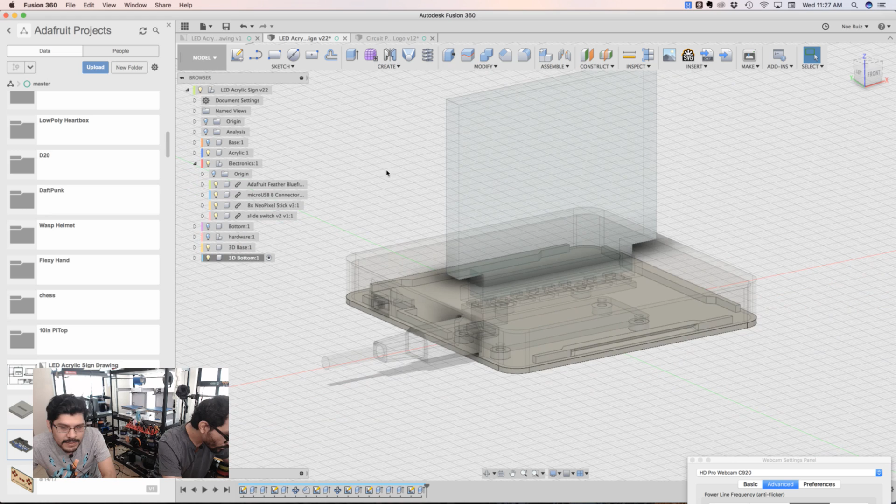We'll take a look here at Fusion just to look at it real quick. So I gave you guys the file, you can download the STLs if you just want to download and print it as is. If you want to make some adjustments, you can download the Fusion 360 archive and put it in your package. It's not just Fusion, you can download it as a step file or an IGS file, so you can import it into SolidWorks, Rhino, Onshape, any of those packages, so it's awesome.

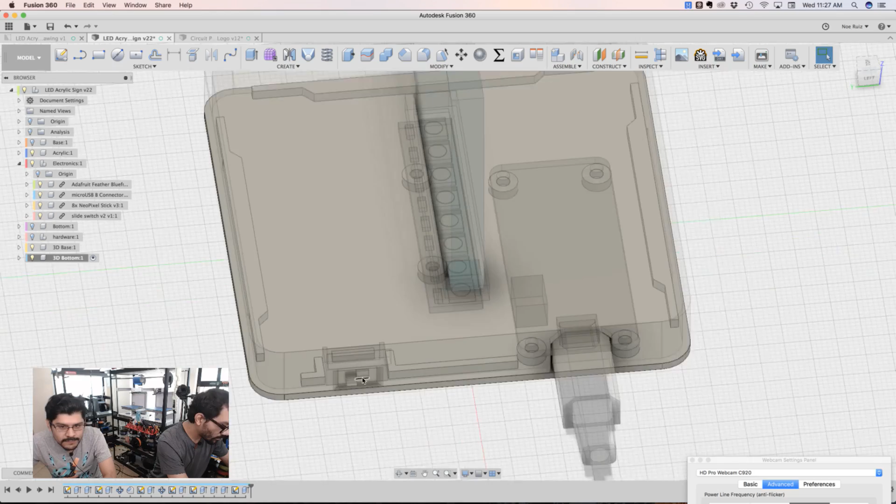Let's take a real quick look at the full assembly here. This is kind of like an X-ray view of it, and what's cool is I got some components in here. Apart from the case, I have the slide switch, the generic feather board, the NeoPixel 8 NeoPixel stick, and even a USB connector. I figured I'd design and model the USB connector just for clearance purposes.

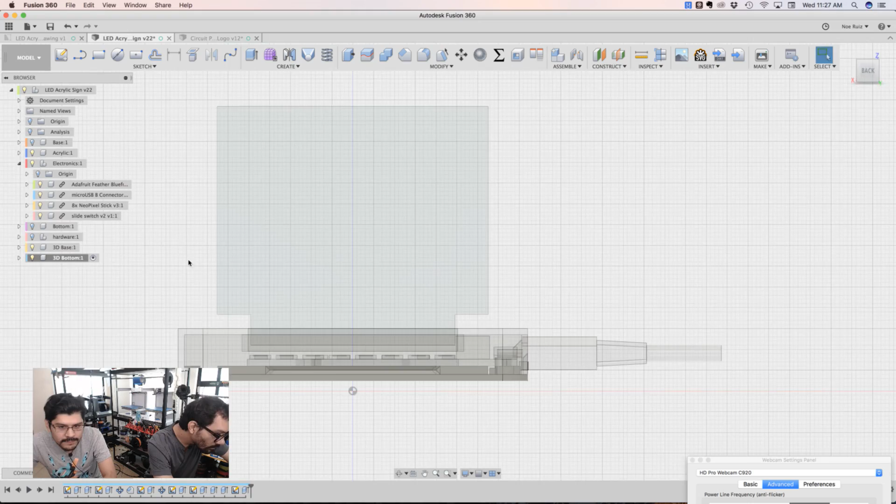I also have my acrylic piece here, which is kind of outdated, but it still works. So if anybody's interested in remixing the design, you can do so.

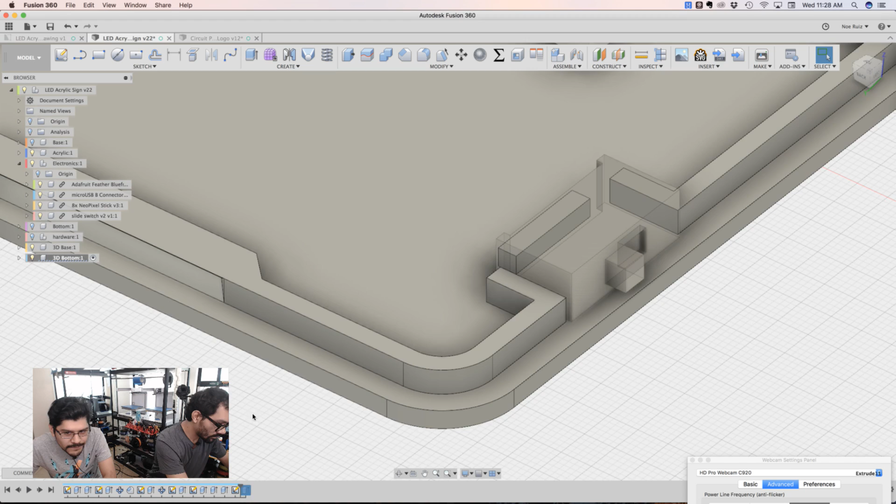One thing I want to note is it's a little different here. If we look at the bottom, you'll notice the lip has these cutouts in all four corners. I had a bit of a problem where, if I step back, you can probably see what it looked like before. See this corner here? For whatever reason, even though I have a nice gap, if we take a look at a section analysis and look at the two pieces, you see I have a little bit of a gap where these nubs meet and intersect with each other.

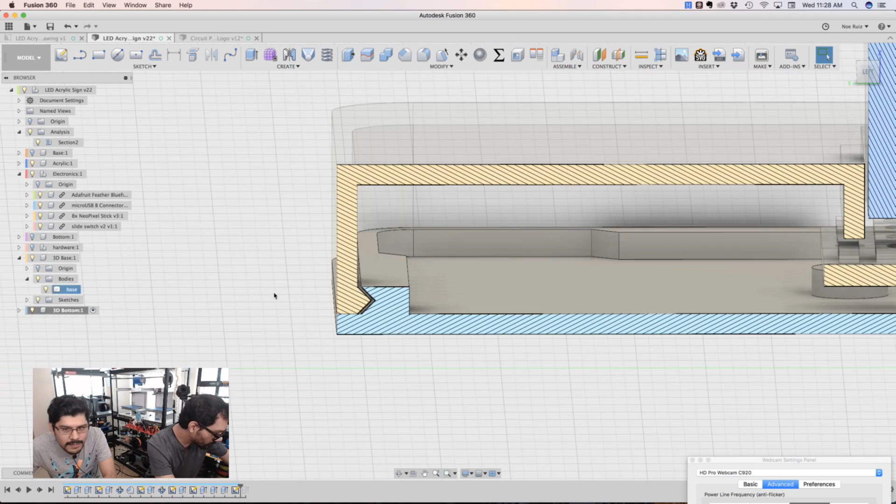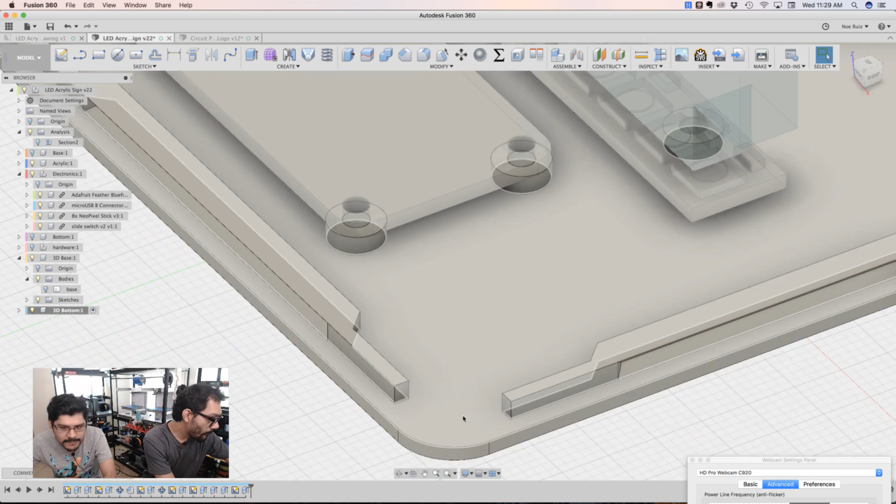You'll see there's a bit of clearance there, about a 0.3 millimeter clearance, and that typically works fine, but for whatever reason these corners were bowing. They would bow and wouldn't work so well. So what I did was just cut them out, and that helps tremendously to make this nice, flat, and even. If you're finding yourself with that problem and you're not sure why, just cut those corners out. I don't know why, maybe it was just the slicer or something, but it worked for me, and it kind of saves on material too.

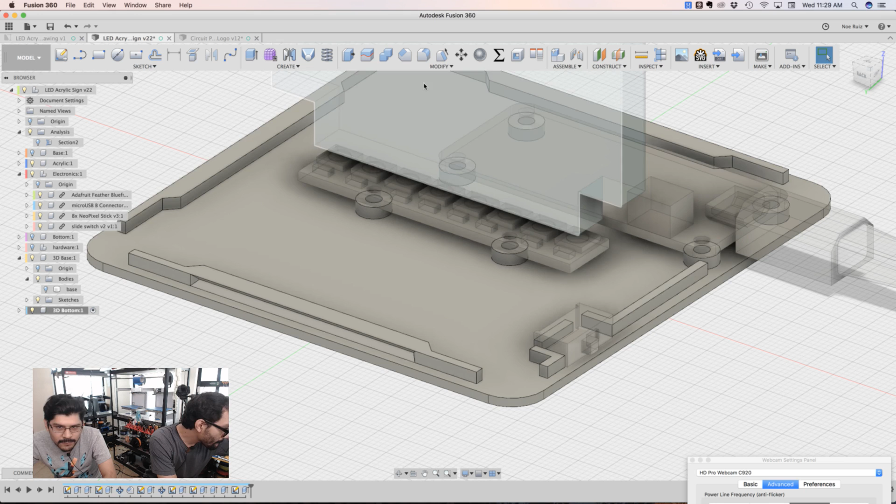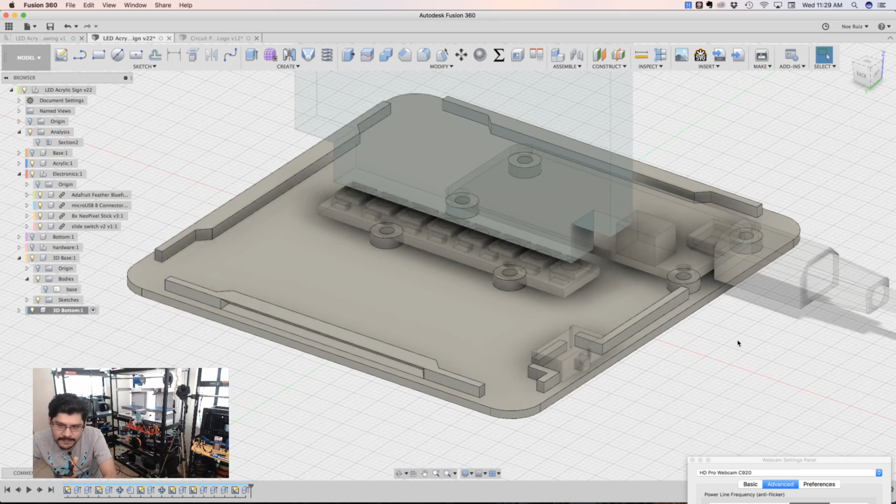So that worked out really well. I also did some interesting different ways to speed up the process. Normally I would make these nubs and indentations one by one, or mirror them, but in this case I actually used a circular pattern to duplicate it on all four edges. I also suppressed this area over here because I didn't need it there, since that's where the switch and the USB port needs to be. So just a little bit of CAD stuff there. That's mainly the interesting things about it.

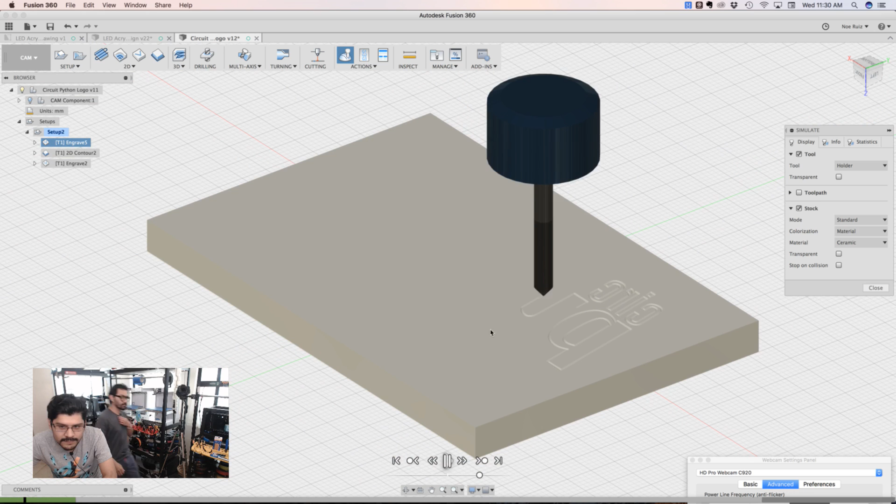It's pretty simple, but one thing to note is that I actually milled it from the opposite end. So although I designed it this way, I had to mill it inverted, flipped this way, because I found out that when you're engraving acrylic and edge lighting it, it actually looks much better on the opposite side, the side that is clean and non-engraved.

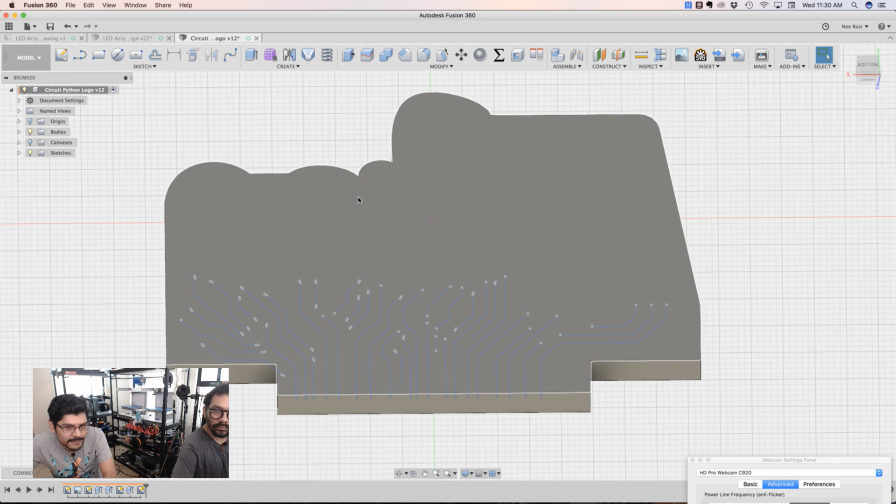So that might sound a little weird, but let's go ahead and jump into the overhead and show you guys exactly what I'm talking about. Let me fix my focusing before I jump into this. I'm going to change the focus over there.

Can you move real quick, Pedro? Yes. Thank you, thank you.

So let's take a look here at this guy over here.

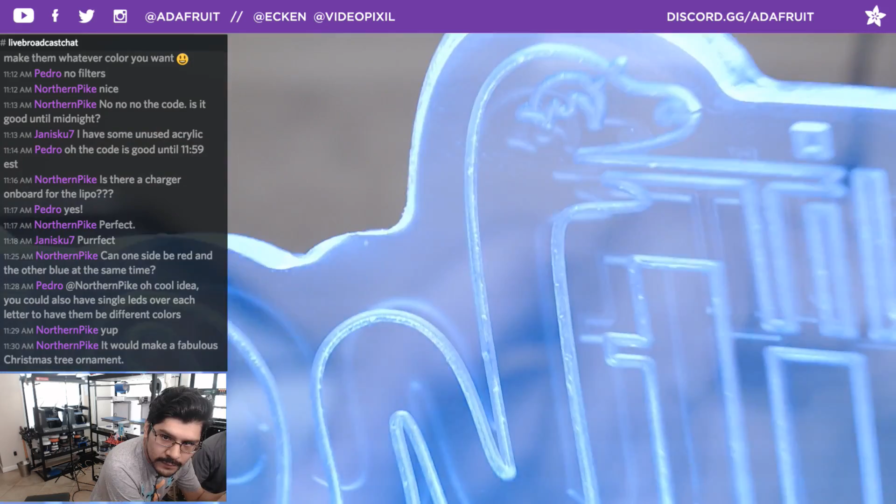So this is actually where the milling was done. You can see it looks kind of grungy, there's still a little bit of particles in there from the milling process. If I zoom all the way out with the focus here, it looks okay, but watch what happens when I flip it. It looks way more punchy, right? That just stands out way better.

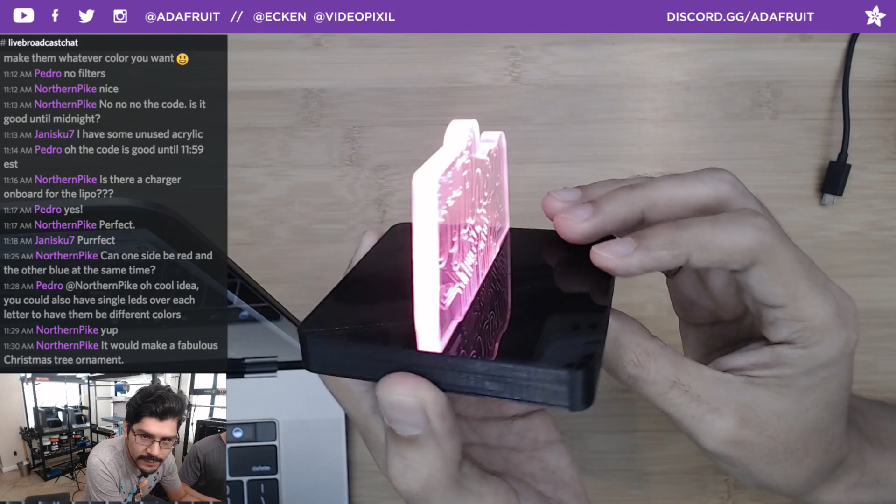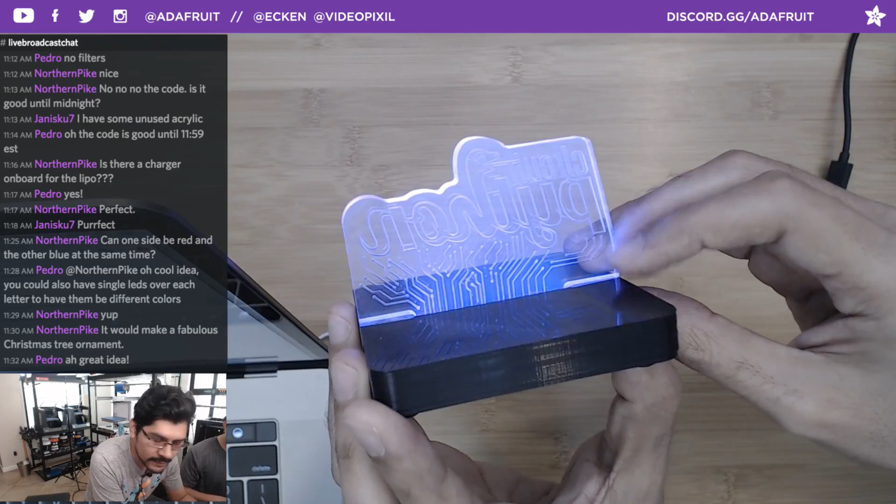So this surface here is clean, there's no engraving on this. The engraving is done on this side. So if you're ever doing an engraving on your mill or laser cutter, keep that in mind. If you're doing some typography, it actually looks better on the side that doesn't have the engraving. I guess that's just what probably everybody who does signs already knows, but I didn't, and now I do. So just a tip for you guys: when you're making a detailed engraving, flip your artwork before engraving. Because if I engraved it normally and then looked at it this way, it would be backwards, it would look like that. So that's one of the things I learned, and it looks much better.

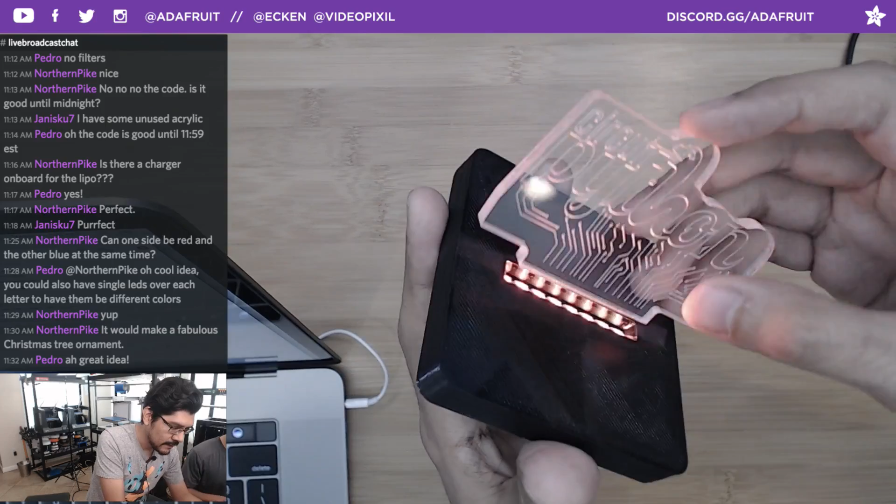Another thing to show is how this comes out. It just comes out like that. There's no special mechanism or snap fit. It just has a nice tight tolerance in this little lip slot area, so it clicks into place and stays there. It doesn't fall out, it works pretty well.

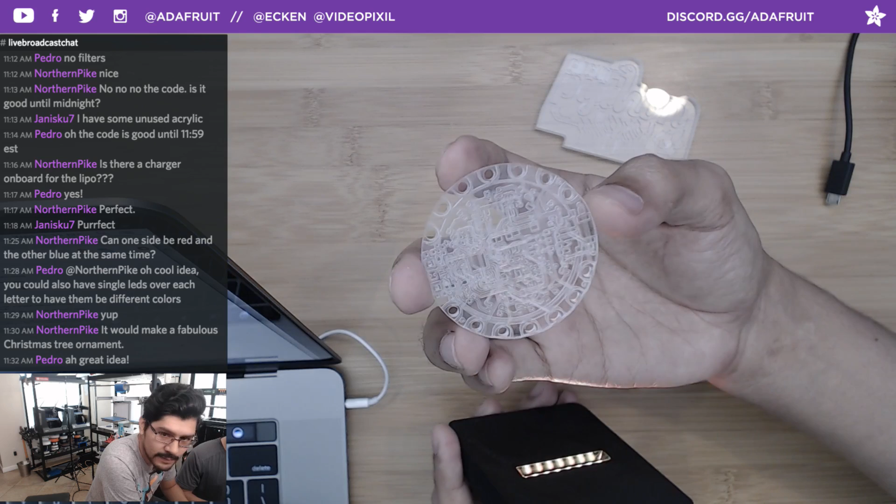What I also have, you probably saw this before, this is kind of a test I was doing before I came up with the acrylic sign, the CircuitPython sign. This is the Circuit Playground Express board milled on a piece of acrylic. This is a bit thinner acrylic, but it's your regular run-of-the-mill acrylic, not the lucite type.

So what happens when I try to edge light it? You can see there's a hot spot, it's not evenly being diffused. You can see the further I go away. It works, but not as well as lucite. So it's just a quick example to show how much better lucite works, it really does evenly diffuse it.

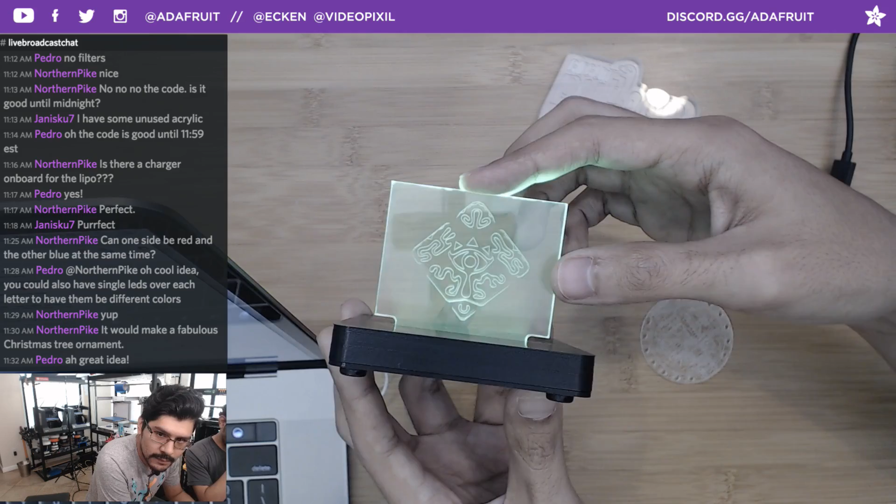Here's another example. This is some artwork from Zelda Breath of the Wild, the Sheikah logo, so you can see here it doesn't need that much light to light it up. It can be quite a distance away and still pick up all the light from it, and it evenly diffuses it, so it's kind of nice.

So now, this is one of the first tests I was doing, and maybe one of the tips is that when you're making a sign, I definitely recommend making an interesting cutout, because if it's just a flat square, it looks kind of boring, there's not much interest to it. So when I first made the sign, I realized I really needed to add some sort of contour, which is why I added this nice contour edge here that follows the artwork.

Another thing I added was these cool little faux traces. They're fake, they don't really do anything, they're just for aesthetics, but it looks pretty neat. Yeah, it looks nice.

Here's the first version I did, which is a little bit cleaner, it doesn't have those traces. That still works out pretty well, but adding the traces definitely adds more detail. This other one is a lot cleaner, if you're more into the clean version you can just not add those traces. Those traces actually aren't part of the vector artwork, I hand drew these in Fusion 360.

So there you go, that's just a quick look at comparing different acrylic materials, and a little tip about engraving: engrave it on one side, make sure your artwork is inverted, and the other side looks way better, it punches out much more. It's sort of the same idea as when you're making your own T-shirts, you have to make sure the artwork is flipped over.

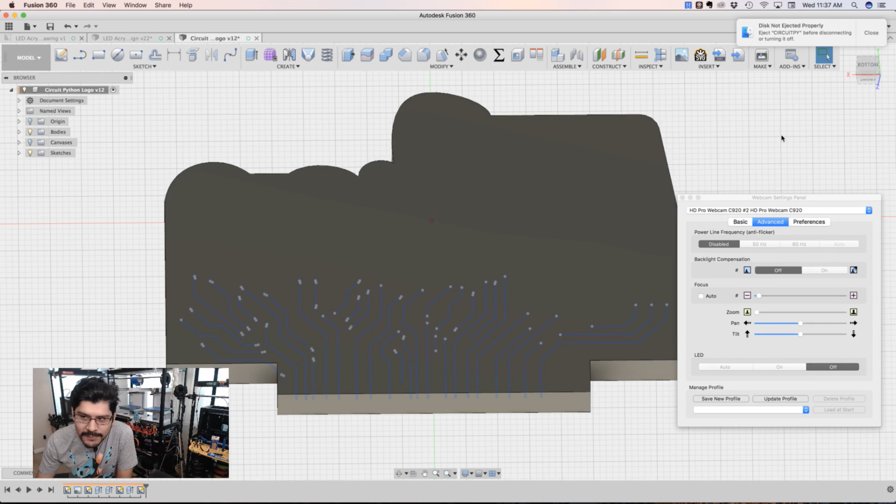I forgot to mention another thing - I'm starting to use this for the first time. These are technical drawings. Fusion 360 has a really cool tool for making technical drawings, so I just wanted a way to quickly showcase what the dimensions are for the case.

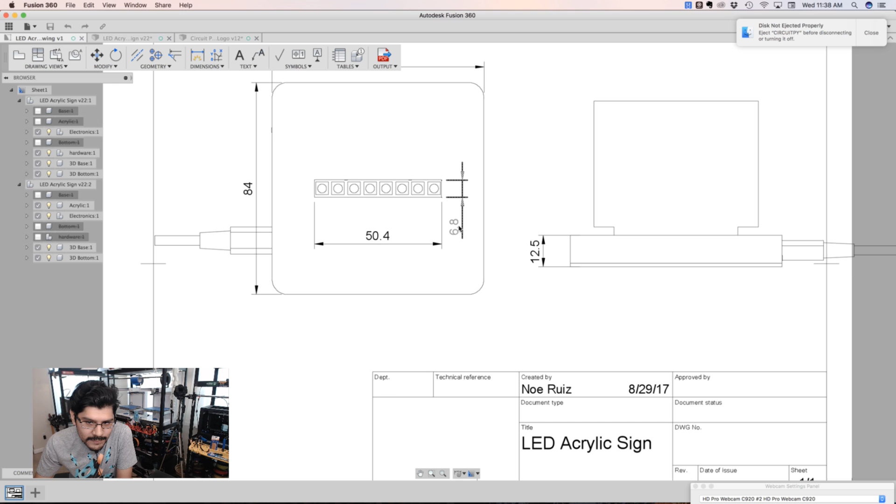In case people wanted to know if this would fit on their printer, if they wanted to DIY their own acrylic version, they'd need to know the dimensions of the slot or the thickness of the case. So I played around with this 2D drawing portion of Fusion 360, which I had never used before, never had a need for it until now. I think moving forward I'm going to start doing this a little bit more because it gives you a better idea of the dimensions.

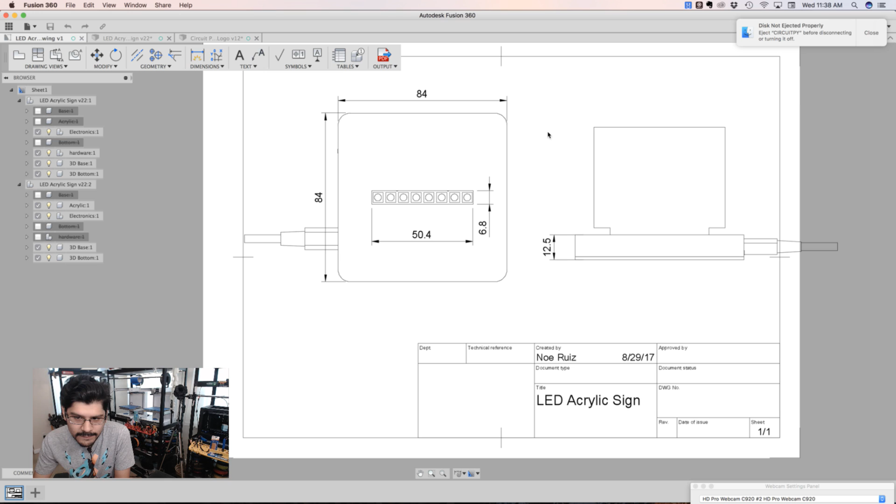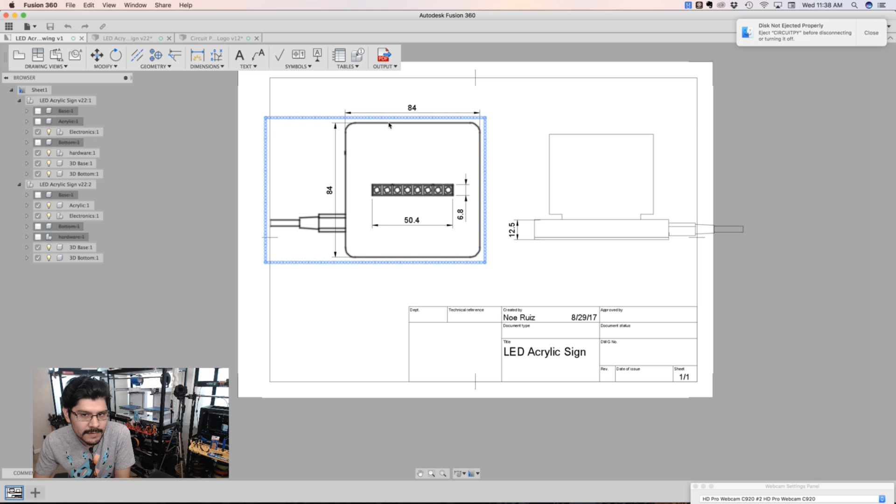This is the type of thing you'd see more for some of our PCB drawings. I thought it was kind of neat - they have a bunch of special tools I've never been in before. I'm sure there's tutorials on how to use it, but it wasn't too hard to get in there, and you can export as a PDF, which is a vector file. You can scale it up as big as you want, and add dimensions and all sorts of different things.

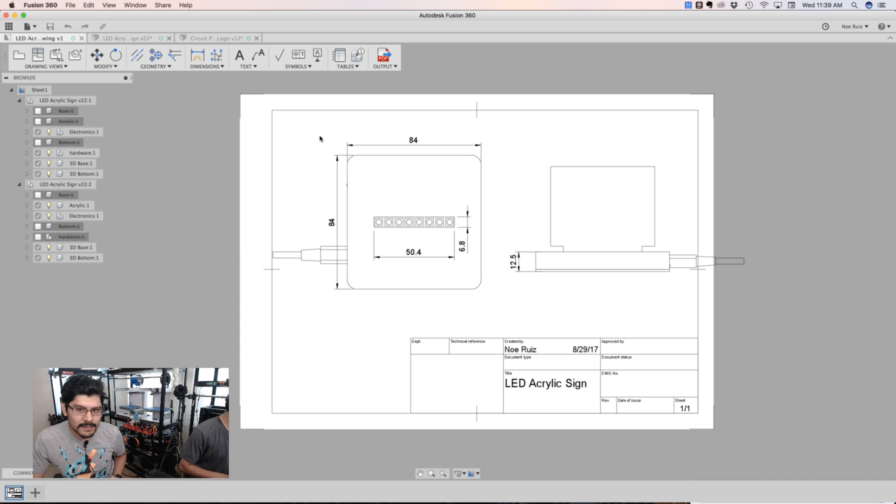I always see the Fusion 360 team expanding and adding features to this, which is awesome. They're always updating, and I usually skip that part of the update because I think I don't need this. But I actually used it this week, and thought it'd be worth sharing with you guys. So if you want to share your projects and really get your dimensions out there for people to see, this is probably the best way to do it.

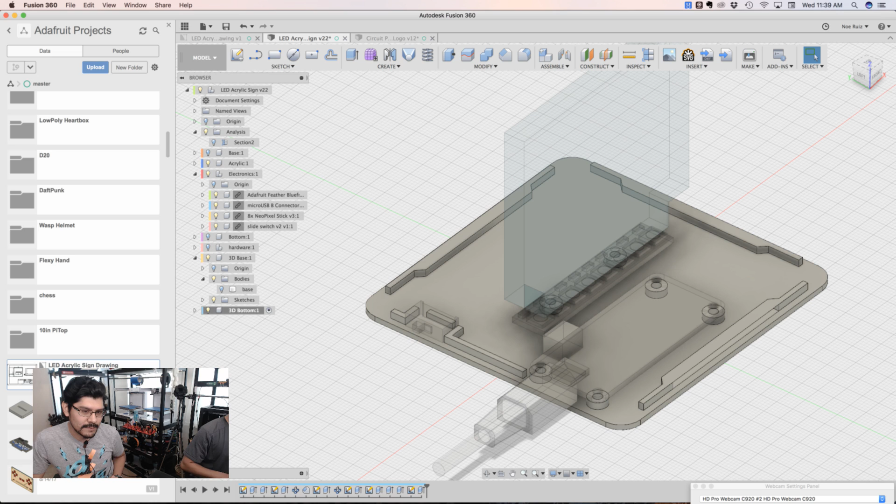It's a standalone kind of document, but it is its own workspace. So if you go into your model and under the model workspace, there's something called drawing, and you click on this from design, and that creates a new document that's kind of linked to the original, but is its own document once you save it out. As you can see here in my sidebar, it is its own document.

Okay, that was a quick look at that, and let's jump back over to the guide and we'll quickly run through. Do you have any questions?

I hope all your stuff is cached. It appears that Learn is down. Oh well, we might have to end the show a little bit. Yeah, it's down. Ooh. We will send out a message. We're going to send an SOS distress signal. I got to punch in the codes. Beep, beep, beep, beep, beep. Warning. That's great. Who do I contact, Justin or Tyler? No, it's Marty, right? Who's in charge of Learn?

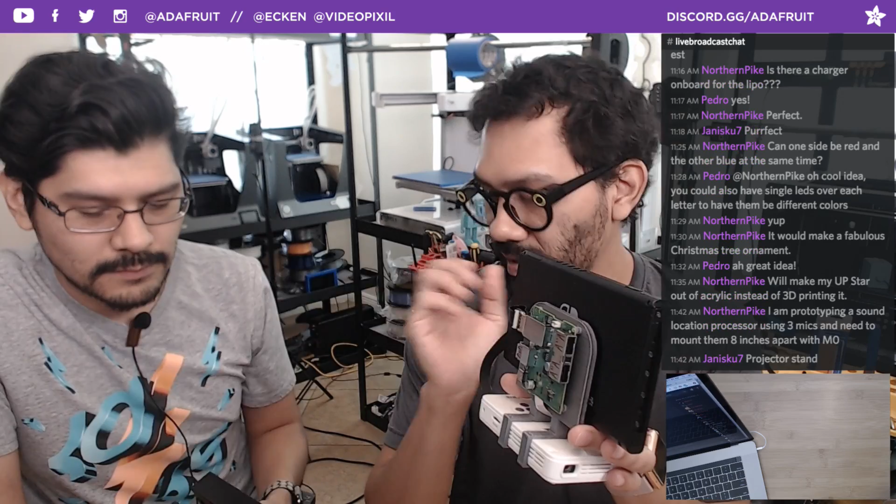That was fast. The Switch dock for this is pretty user-friendly. It's this right over here. Hey, look, this is a Switch dock. Guess what? We gutted the electronics from it, so you're able to easily take this apart. They do have some tri-wing screws, which we do have in one of our driver screw sets. This is where the board lives, huh? Yeah, super easy to take apart.

It's a bit of a hub, so it has an AC adapter, your USB, and your HDMI out. So this is where you would plug it into your TV, but instead of a TV, why not put in a pocket projector? That's the whole premise of this project.

Yeah, especially with a lot of people opting to just have a tablet or using their computer as their main source of streaming content, it makes sense to just have a nice little projector that you can stream all that to. So not going to go too much into it, but you can see it in action if you check out my Instagram account. Let's quickly get this going.

Yeah, so like you were saying, there's a lot of space in here that they have and we were able to utilize. I was able to get it down to this tiny little portion of a dock, having the PCB mounted right on the side and make it even smaller.

And the main star of this build is we're using all of our new DIY HDMI components, like the super flexible thin ribbon cable for the HDMI connectors, as well as the do-it-yourself connector pieces, which I like to think of as little Legos for a bunch of the HDMI projects we always do. A lot of different cable lengths, and all the cable lengths are compatible with these little connectors.

So they all work really well with each other. You can mix and match them, of course, and we have a bunch of them. These are all HDMI, so HDMI right-angled, straight-angled, upside down, upside up, left angle, right angle.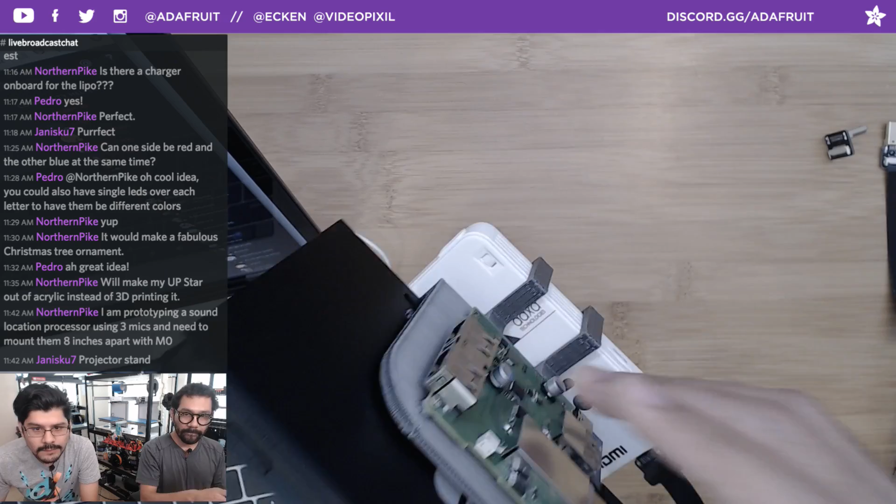And that's actually what I'm using for this here, so you can easily just route this around, not have this gigantic cable, since the whole theme of this is trying to make it as small and thin as possible. You can actually even make it even smaller than that. What I'm doing, when we're prototyping, before we actually print out the whole entire piece like this...

We have to make sure that all of our ports line up, all of our mounting holes line up. Here's a little piece I used for making sure that the slot that guides the Nintendo Switch into the port lined up perfectly. So what I discovered is you actually don't need such a big dock if you just want it to stand up - it works with this teeny tiny adapter piece that I used to make sure all the ports lined up.

So they did a really good job of balancing the weight for something like this - nice and centered. You can see all the ports all lined up from there.

So we'll talk about this - it's a great way to kind of repurpose all the guts here and make your own DIY case. And if you guys checked out the Discord, I think Phil posted it under the Show and Tell channel - he picked up one of the third-party docks that you can actually use instead of having something that's just so big like this.

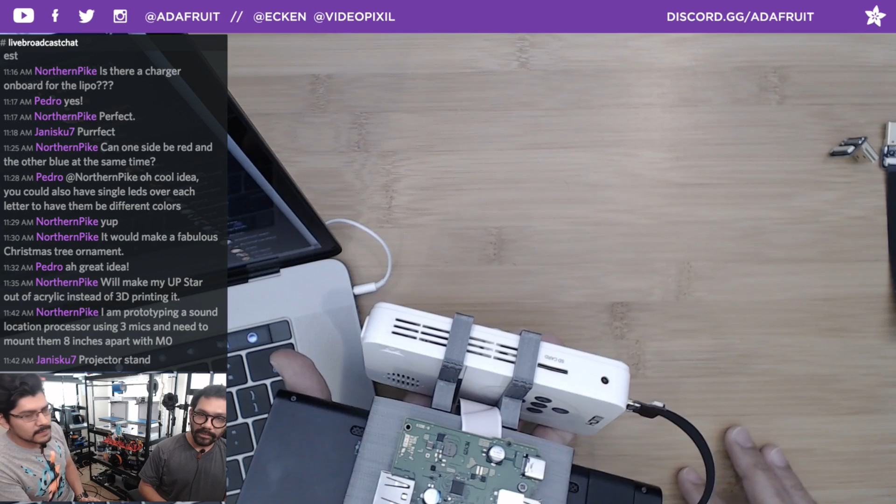It's supposed to be a portable projector, so it's pretty nice. Let's see if I can get this to turn on.

I got this one because I saw somebody from the Hammerhead Hackerspace actually use this projector to make a Rick and Morty portal gun, which is pretty awesome.

There we go. I don't know if you can actually see it with all the lights on, but you can kind of see it on my shirt there. Oh, it's my hand covering it. There we go, pretty cool.

You can see gameplay—I'm playing Zelda Breath of the Wild on the Instagram account, and that'll be next week's project. Obviously you can use this with more than just a Nintendo Switch. I'm thinking about doing one for a phone, to do projections. A lot of people, especially in the city, project stuff onto the side of a building, so it's a really cool little portable projector.